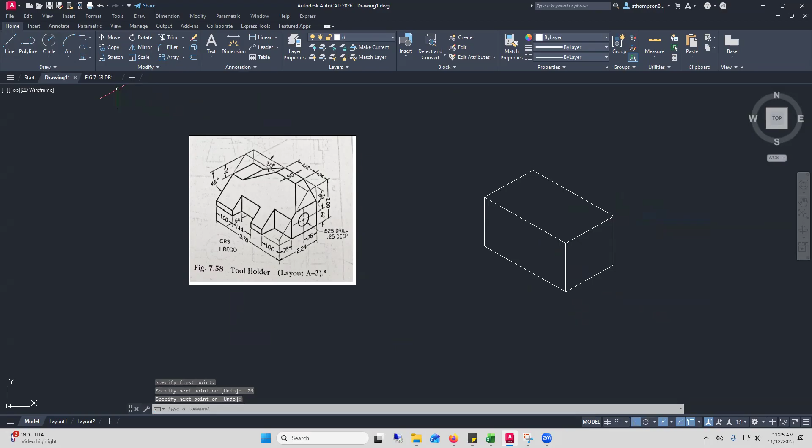Remember whenever I came over here. So now I can connect those two endpoints, and that's my 45-degree angle.

Now I can copy that, or I can come over 0.5 and up 0.26 on this side. I'm going to go ahead and copy it. So I'm going to click on it. I'm going to go to copy. I'm going to choose this point as my base point and this point as my displacement point.

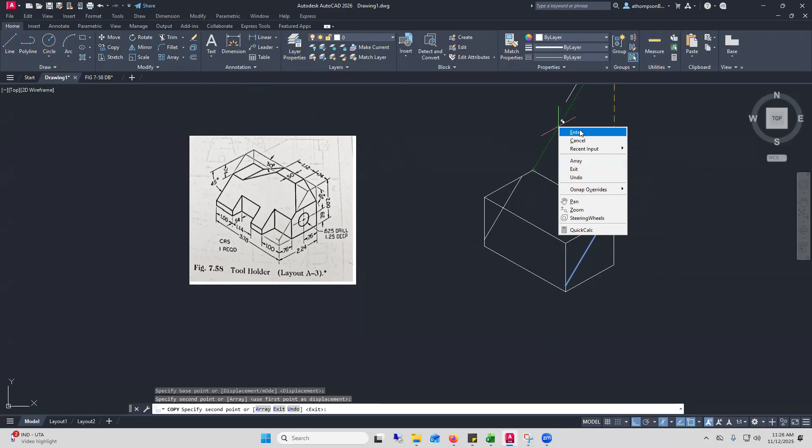And what that's given me is the ability to come in here and connect these with a line. Now, I still have a lot to do, but I no longer have to worry about getting this 45-degree angle and figuring out where these other things are, because I have the basis of what I need to do that.

So I can come, if I want to work on what's in the front here, I can come over 1 and then go straight back 0.54. And that's what I'm going to do.

So I'm going to click on line. I'm going to come right here, and I have to hit F5 to go over top of my line that's already there. So I'm going to type in 1, enter. And then I'm going to hit F5 again because I want to go back in the right plane, and I'm going to type in 0.54.

So this is at the very bottom of the object. So in order for me to figure out how far up that goes, I'm going to have to go back over to my multi-view and figure out how far that is.

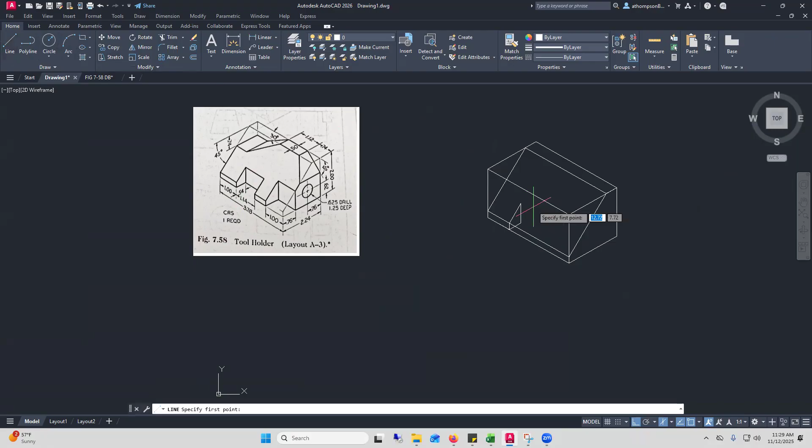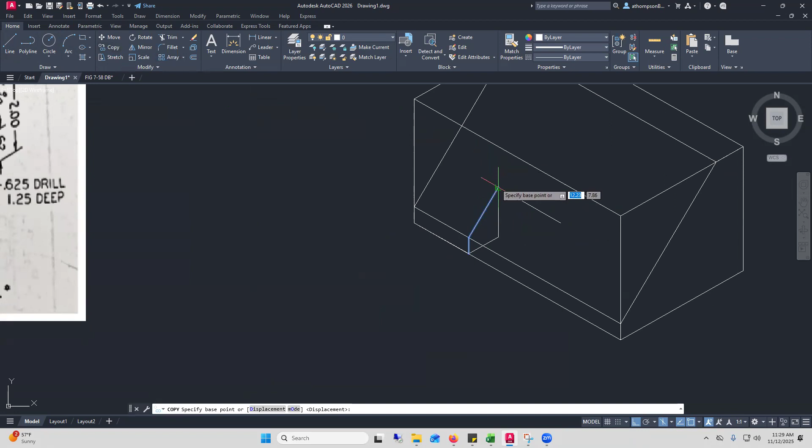We know this distance is 1.14 in between. So to get that, we can come right here and make that line over 1.14. And since we already have this part of it, it's going to be easier just to copy. So I'm going to copy this one and this one, and click copy here. I have this common endpoint, so this is my base point and this is my displacement point.

And of course, we need this line to finish us out. It just goes up to the other line. We will trim what we don't need out of here. And now we have that cut out.

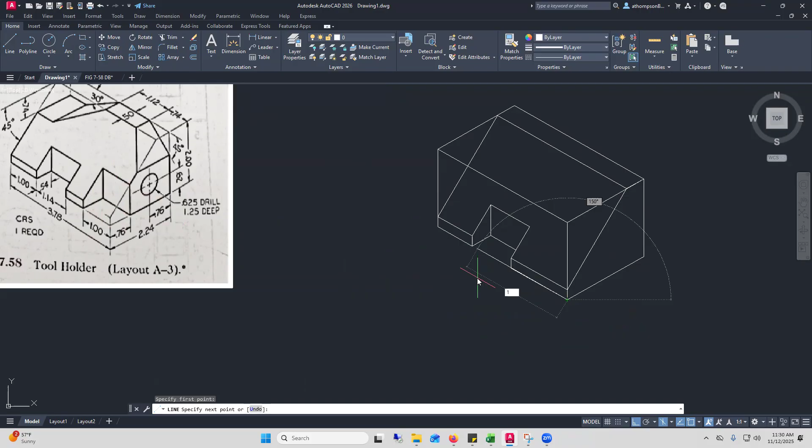Now we need the corner part gone. We know it's 0.76 back and 1 over. So we are going to go 1 in this direction first. So 1. We know we need to go straight up to this point because we learned that we had to do that over here. And we're going to go ahead and trim that out.

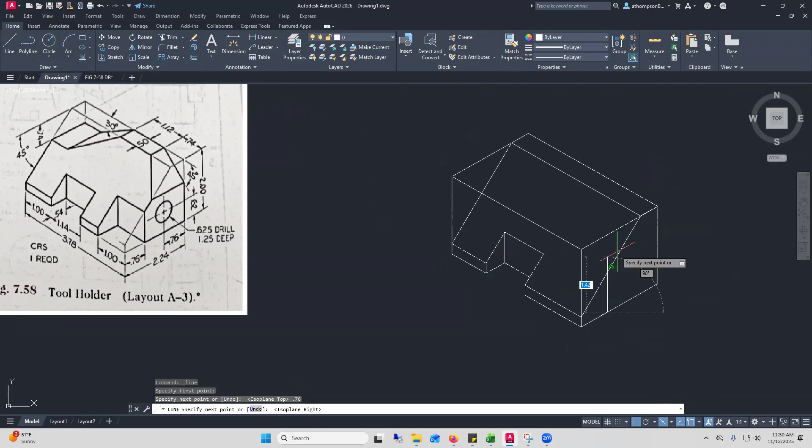Now we know that we need to go 0.76 back in this direction. So we'll figure that one out, 0.76. And we know we need to go straight up to where it meets that angle. So since we already have this line here, all we have to do is trim it out.

Now, this was 1 over as well. So if we made the line 1 over, we can just connect the two endpoints. So we're going to click here, make sure we're going in the right direction, go 1, enter, and then we come down here and connect to that endpoint that we already have.

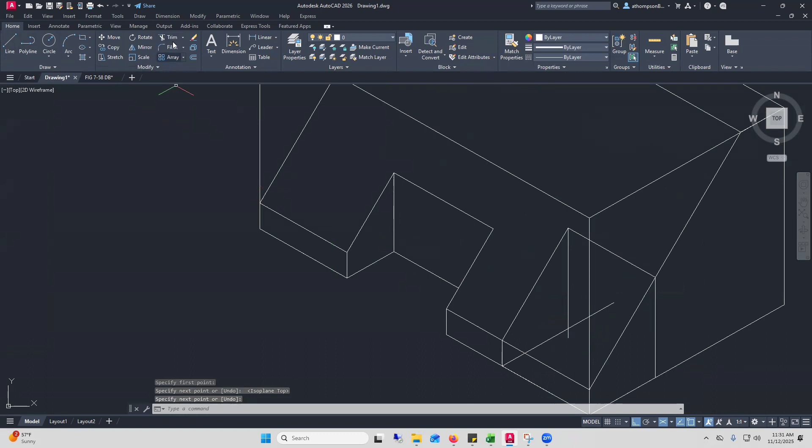Now we do have to come right here and make this line straight down. So we could copy the line that we already have, or we can just make it down. We don't really know—well, we do. That was 0.76, so we could have typed that in. But we know also that these two lines are going to meet. So because I didn't type in my distance, I'm just trimming.

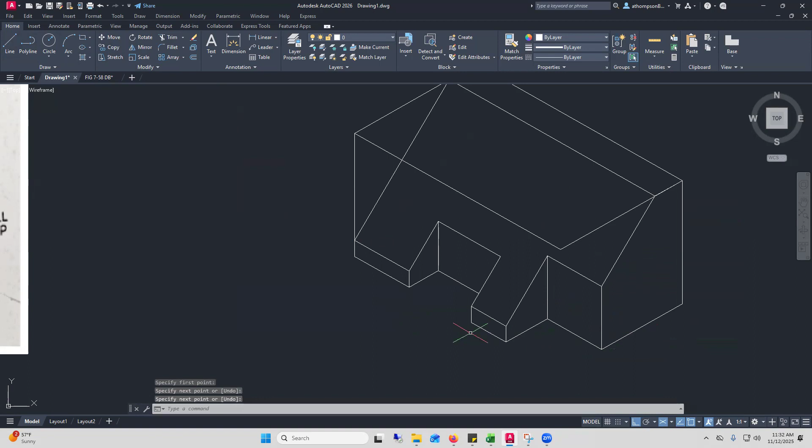And I can also start trimming out some of this area. So I know all of this actually goes. I don't want to take off too much of my top yet because I might need some of that. What I do need is to finish up this line across, so those two should connect and meet. Okay, so that gives me the front part of that.

I have an angle here and another angle here. Now, we talked about 45-degree angles. So if we know we need to go over 0.74, then we also need to go down 0.74 to get that 45-degree angle. So let's work on that one. We're going to come right here from the endpoint with a line and type in 0.74. We know that one comes out to meet the line that we already have, so I can trim that off.

And then we also know that we can go down 0.74 because it's a 45-degree angle. So we're going to go straight down. And then what happens is those two lines will meet.

Now, this one is already at that angle, so we would have to figure out where that was. But what we can do instead is just bring a line from here straight over to figure out where this endpoint is going to meet that angle. And at those intersections from here to here is where we put the other line. So now we can trim that.

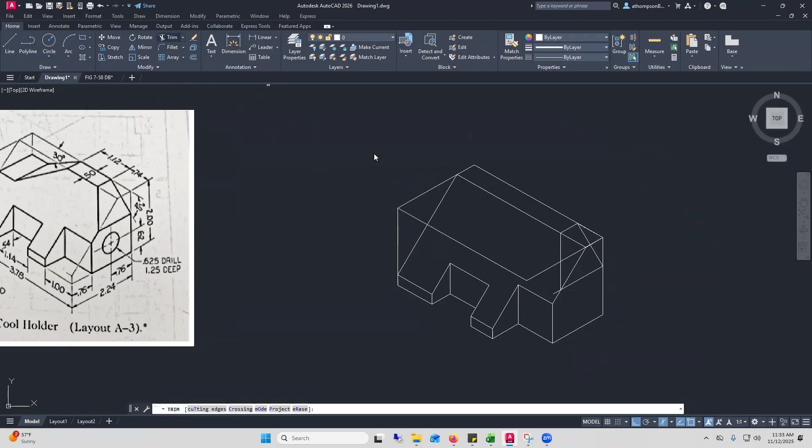Now we could have gone into AutoCAD and figured out what our dimension was, but we know that our lines are going to end up meeting. So how we did it was just fine.

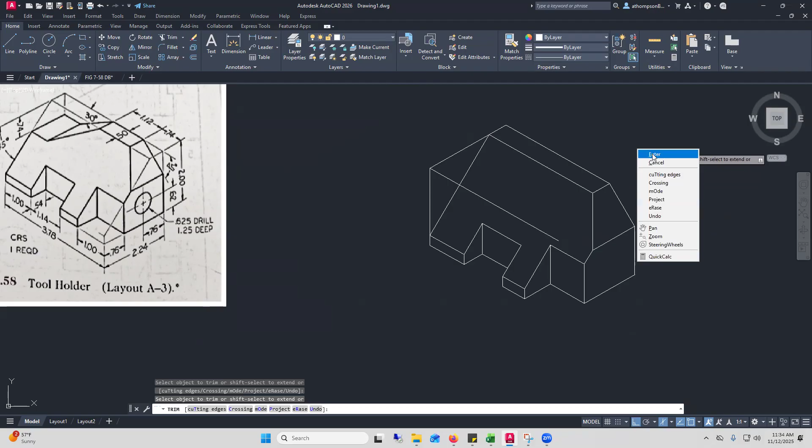And we end up getting that part. We probably won't need this line anymore for that corner. So we actually have a good amount of this drawn. Over on the other side, we have a 30-degree angle. We're going to do it the exact same way.

We need to come over from this point, 1.12. So I'm going to click on line command, come here. Just make sure I'm going in the right direction. Type in 1.12, enter. And I'm also going to come out and just have it meet the front line like we did right here.

And the 30, we know it's 0.74 down, but we don't know because this is not a 45-degree angle. It's not going to be the same on both sides like a 45-degree angle is. We just have to figure out what those dimensions are based on our multi-view.

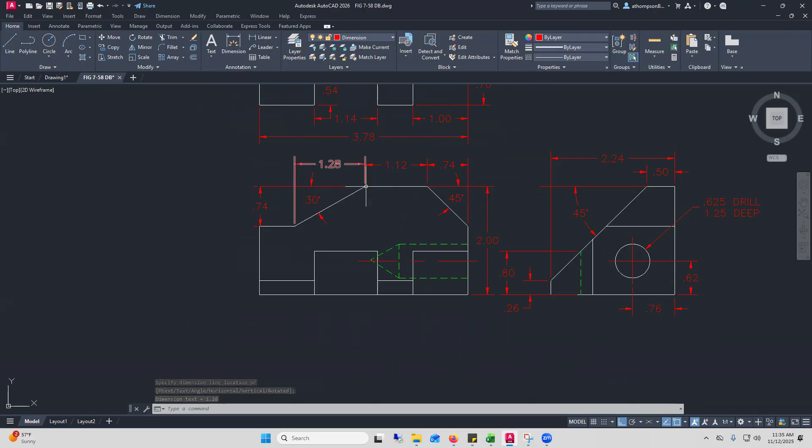So we need to toggle back over to our multi-view. And we can do this a couple ways. We can figure out, because we have this point, we can figure out this point, which is going to be the 1.28 right here. So from the point that we have on our isometric, we can go out 1.28 and then go down 0.74. So let's do that.

Let's do a line out 1.28. And then that's going to go straight down 0.74. And then what's going to happen here, this endpoint and this endpoint are going to meet.

Now we have to figure out, because we know that we have this little flat area that comes out 0.74, we have to figure out where that comes out to, because we don't know how far out to come. We know we need to go down 0.74, but we don't know how far out to come. So we can't get the other side until we do.

So we'll toggle back over and we will put a dimension right here, and that tells us that's 1.24. So from that back corner that we do have, we'll come out 1.24. And then we'll go down that 0.74.

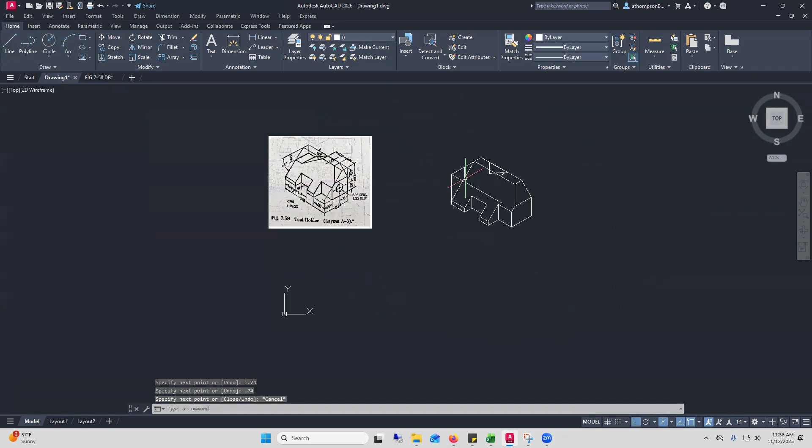So from here, we'll go towards the front of the object, 1.24. And then we're going to go straight down 0.74. Okay, so that gets us exactly to the spot on that angle that we need to go.

Now we don't know exactly this distance, but if you remember, we do know that dimension because we figured it out. That was 1.28. So we're going to go that same amount, that 1.28 from right here. Actually, no, we won't go the 1.28. We'll need to go the opposite of the 1.28.

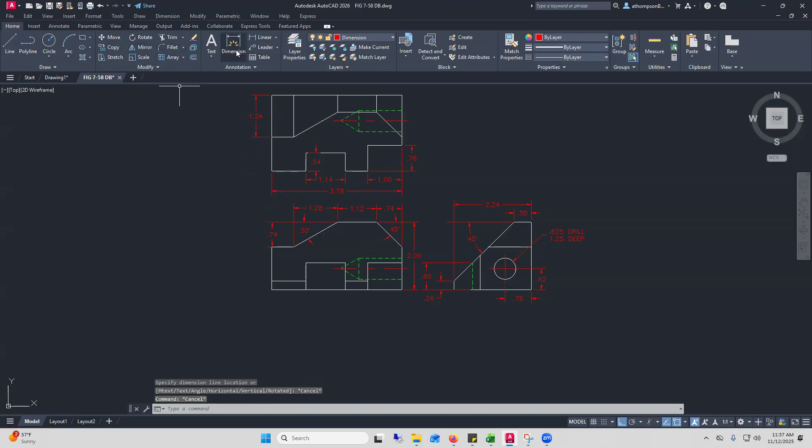We have this, but we actually need this part. So let's figure out what that is. And of course, we don't want to keep these dimensions on your multi-view. We're putting redundant dimensions on there if we did. So all the dimensions you create, you need to erase.

And so this is 0.64. So from here, we're going to come out 0.64 back towards, like in our front plane. So type in 0.64, enter. And that's what's actually going to come up and meet our line right here, the end point.

Okay, so we had to figure out how far out to come and then how far over to come to figure out where that met. But the great thing is all these lines are starting to meet up again.

So this line will meet up to the back side. We can actually copy that line from here to here to show where it meets up. Or we could have come straight down 0.74 here and that would have met as well. But then the last line here goes from that endpoint to that endpoint.

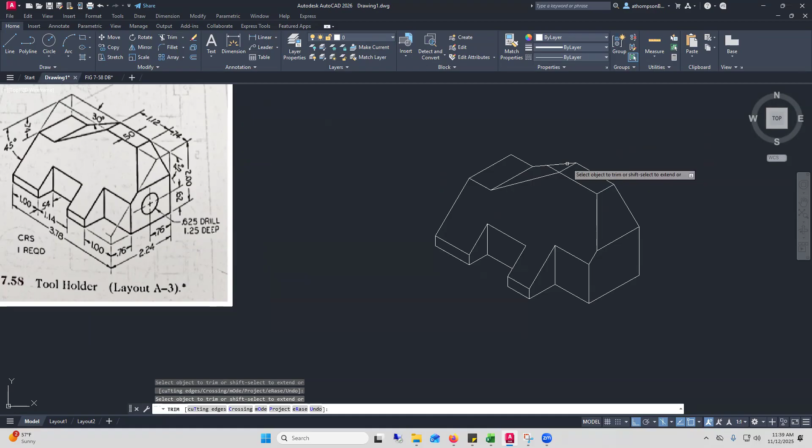And we got quite a bit to trim. So we can go ahead and trim out some of this stuff. And we've got lines over top of lines, so it might take a couple clicks. And that is our object.

You still need to go ahead and put the hole in here. No need to put hidden lines for the depth. Just go ahead and make the hole. It's a 0.625 diameter. So you would take half of that, which is 0.3125, and make that an ISO circle. And you'll go up 0.62 and over 0.76 to make that an ISO circle.

And so the way we would do that is come here from this corner, because that's where our dimensions are coming from, and we'll do 0.62. And then we'll hit F5, come back, 0.76. And remember, we have to type in EL for ellipse to pop up. Click on ISO circle and click on the center.

Make sure we're in the right plane. So I'm hitting F5 to get in the ISO plane right. And that was 0.3125. Enter. And we'll go ahead and delete out those construction lines. And that gets all of tool holder figure 7.58.